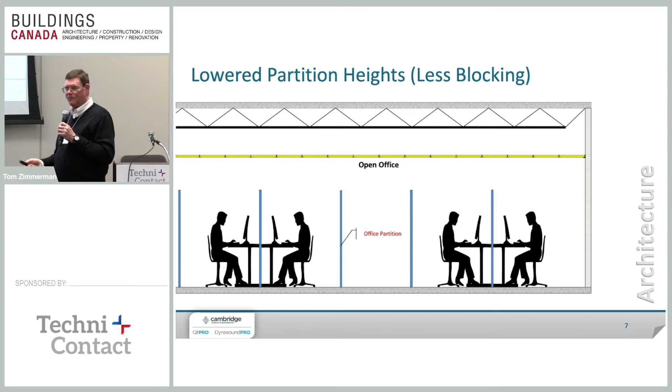So again, we're going to go back to the basics here. If you grew up in my generation, you had partitions, you had cube farms, so you had partitions everywhere that blocked you from the people around you. And so this blocking sort of was your privacy mechanism. So what we are doing now is we're kind of taking down all that blocking. We're making it so people can see the windows, so that people can collaborate. More and more we hear everybody's got to collaborate. You got to be able to talk to your neighbors. You got to be able to discuss things with everybody around you.

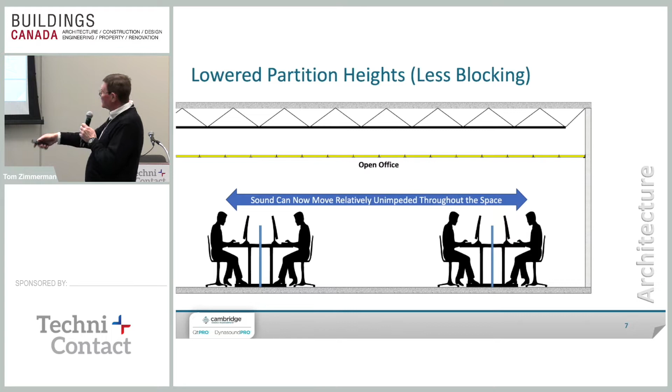Okay, so now sound can travel unimpeded through the space. We've taken our acoustic tile ceilings. We used to be able to have some acoustic tile that would absorb some of the sound. And when you have absorption, the sound that hits it is less when it gets to the next person on the bounce of that sound. So we take away the acoustic tile ceiling. We now have a hard reflective ceiling, the deck basically of the floor below or the floor above you.

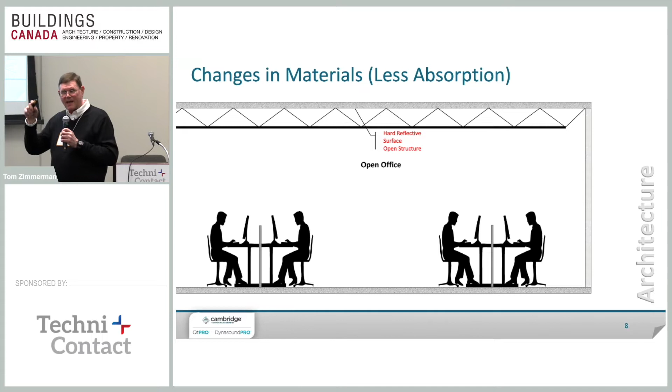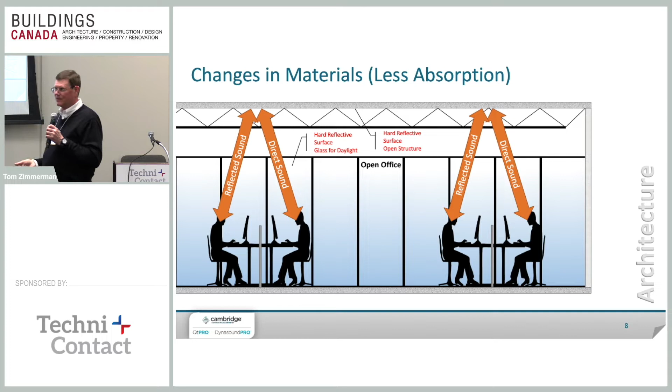Sometimes you spray it with some acoustic material, sometimes you put fire retardant, sometimes you put other things that can absorb some things, but not as much as an acoustic tile ceiling. So now sound is directly reflected back up and down. You also put in glass. Now everybody can see a window, so you have this new reflective surface, glass, which is not very absorbent. And so you have this hard surface, and now people hear more and more things bouncing off the glass as well. So the sound builds up in these spaces.

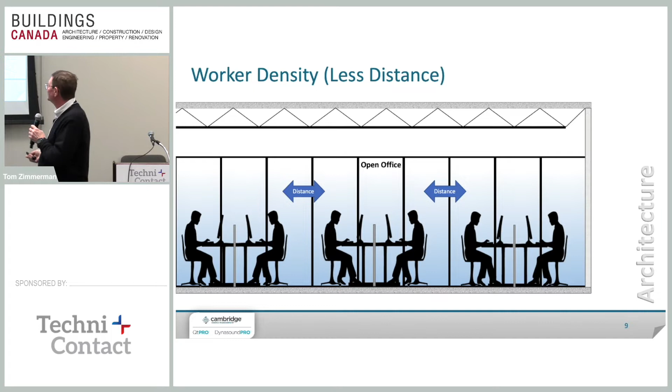Then you have the worker distance. You used to have people basically in an 8x8 cube, maybe a 10x10 cube if they were really lucky. And what we do is we take all of those people and we shift them closer and closer together so that now the worker distance is basically one person for every 10 square feet instead of 100 square feet. So again, that's what's happening here.

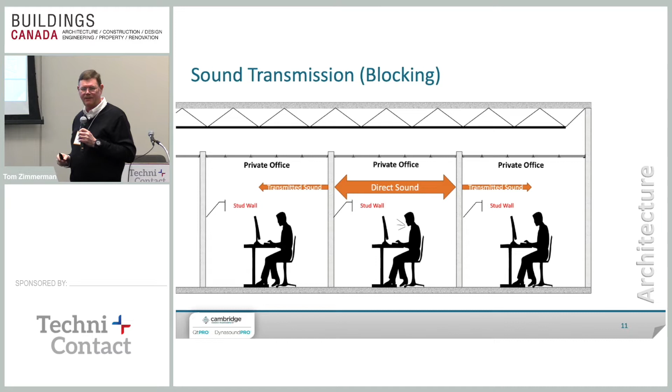Private offices, the same sort of thing is taking place. You used to have nice, thick, usually double gyp walls with furring in between, some space gaps, maybe even filled with some fiberglass. And what we're seeing is, first we said, well, we're not going to take those walls all the way to the deck. Because it's a lot cheaper, we're going to just build them up to just above the finished ceiling. Then what happens is that we have the sound that bounces over top of that. So people are now hearing directly from the offices next door. So you still have a little bit of sound that's taken away, but you have a lot more that is just bouncing over the top.

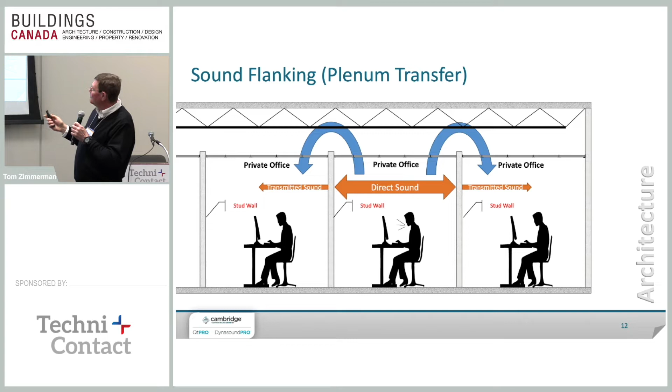We found that you get tax credits and other things for putting demountable walls in instead. And facilities people love demountable walls, because if you decide to rearrange the layouts, if you want to do other stuff, you just take them out. You want to turn this private office into an open office, that's great. This is really easy. The problem is that demountable walls are not as thick. They don't block as much sound going between them. So again, you get more transfer from one person to the other.

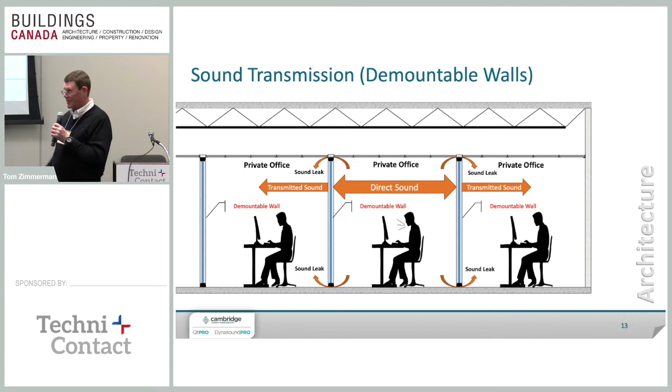You have sound leaks at the top and bottom. Usually you have gaps of some sort if the furring isn't done just right. If you don't seal them properly, you have a lot of sound that gets transmitted right over the tops of them, plus the stuff that goes over the top naturally. Also in private offices, a lot of times you have the electrical receptacles back to back, so sound leaks around those. If you have any ductwork that has penetrations, it goes right through those too. And if you have ductwork that's not properly fitted, that doesn't have baffles in it, you have an instant intercom that goes between all of those offices.

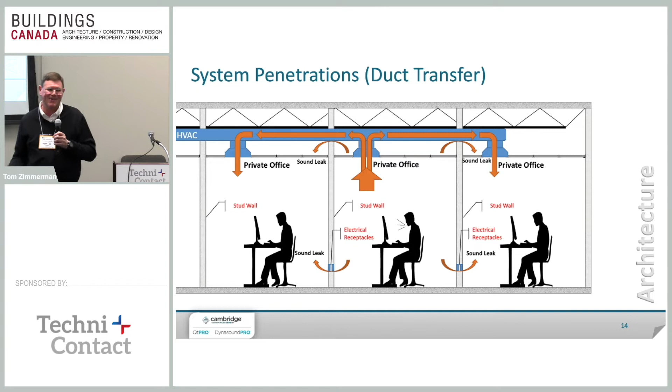So again, we normally get calls from people saying, it's as though there isn't even a wall here. And I go in and I look and I said, well, there really isn't a wall there anymore. It's all just an acoustic nightmare. So we're going to look at types of sound masking.

Again, I don't know why this guy's always on his toes, but he is. And he's a happy guy.

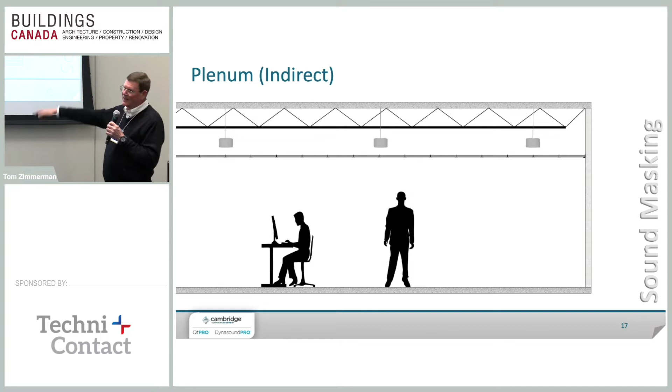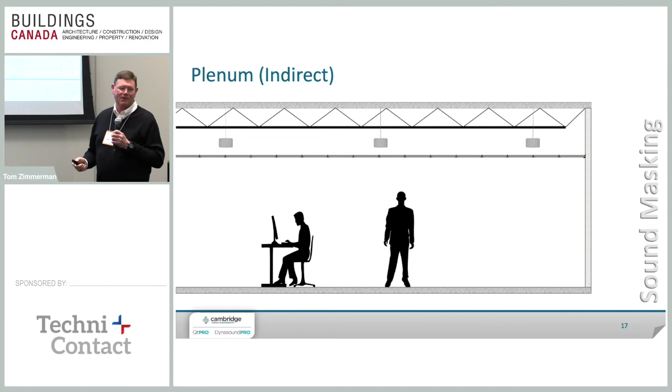So we put up the sound masking, and in this case it's called an indirect system. Indirect means that you can't see it. It's above the finished ceiling. Okay? So a lot of architects in particular don't like to see anything on their ceilings. Interior designers don't like to see things on their ceilings, even though there's hundreds and hundreds of WAPs and LANs and other stuff going on. They don't like to see speakers on the ceiling. So we put it up above the ceiling, and again, we bounce it up off of the deck above. It comes down, it filters down, works great.

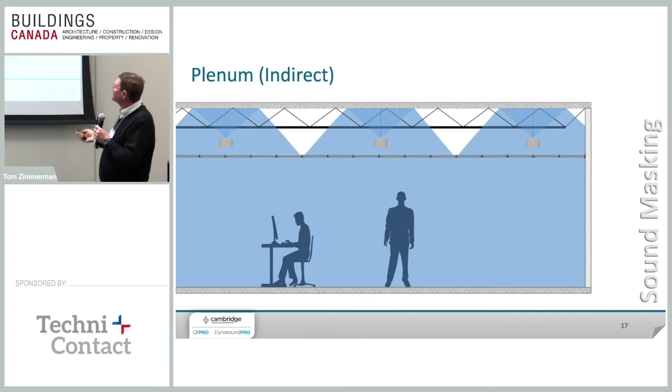And we can design these systems as long as we know what that ceiling material is. The reason we need to know that is if it's fiberglass or something that could be absorbent, but not very reflective, it doesn't have a good CAC value. If it doesn't have that, then it tells us that we need to space speakers closer together. If it has a high CAC value, like mineral tile or something else, then we can space the speakers farther apart because it does more bouncing up and down between the deck and the material before it filters down.

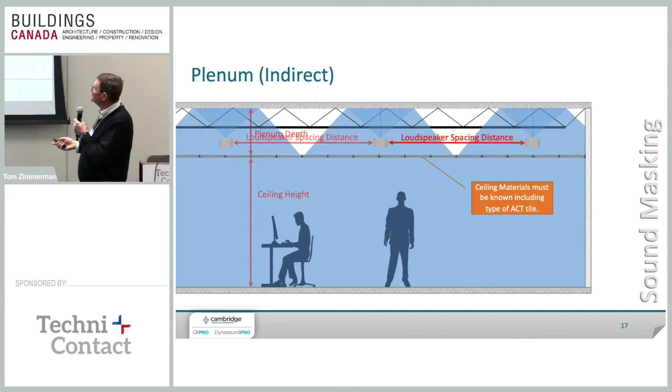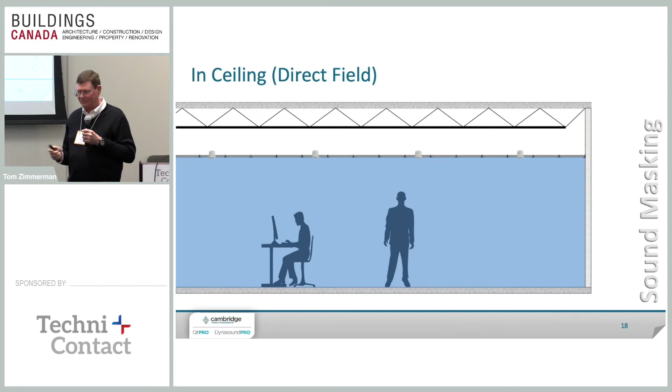So our loudspeaker distance is all based on what that material is, how high the ceiling is, ceiling height, plenum depth. We need to know all those things in order to design an effective system. Our company has a patented system that we call the direct field. So we have little tiny speakers, 3 inches, that go actually firing down or mounted into the acoustic tile ceiling, in this case. And it allows us to exactly know what it's going to sound like when we install it. And I'll get into why that's important in just a bit.

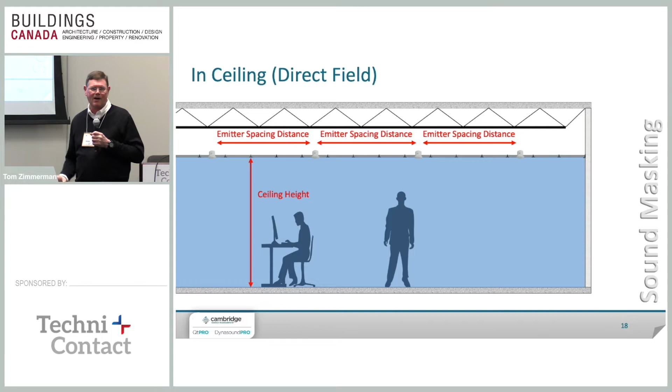So if we know the ceiling height, we know exactly how many speakers you're going to need. 8-foot ceiling, an 8x8 grid. 10-foot ceiling, 10x10 grid. 12-foot ceiling, 12x12 grid. The higher you put them, the less speakers you need because of the coverage of each speaker. You can also mount these direct things onto either the truss or the deck itself or other things. We have all sorts of mounting options where you put them on pendants, whatever you want.

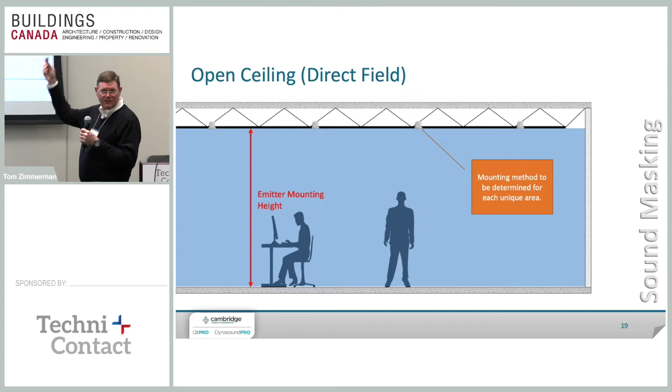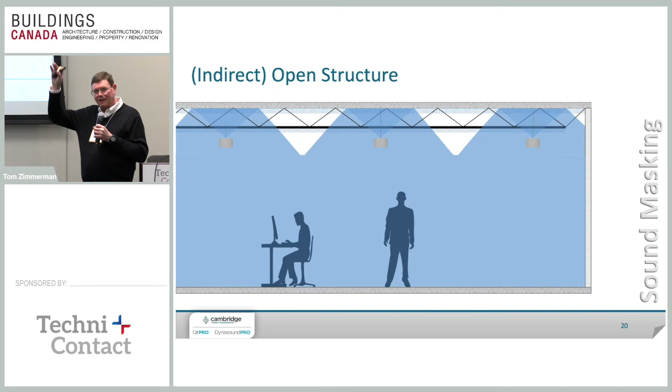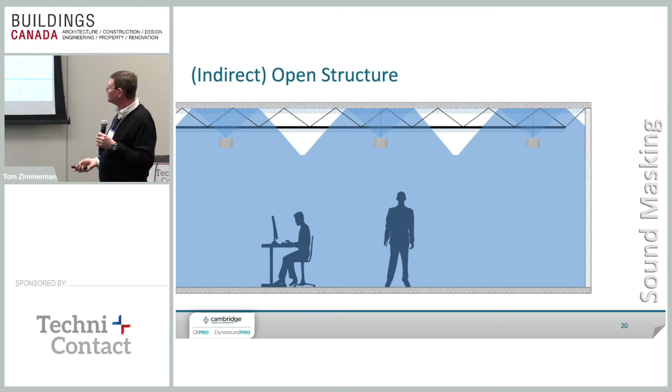But again, you get them up higher, you need less in an open deck ceiling. But again, in this case, we're firing directly down. We know exactly how it's going to sound. So if the emitter height goes up, you need less speakers. The indirect, again, when you have an open ceiling, when you're not doing it in a plenum space, it's just one bounce up, it comes back down. You need more speakers when you don't have that area for it to bounce around up there. So if we know the deck height, we know how many speakers you need.

Underfloor, many people haven't ever even seen an underfloor system. You know, the old dinosaur rooms where they used to have the computers, where everything was raised floors. Well, they still have a lot of those in particularly old bank buildings, old finance buildings and that sort of thing. Places where they used to have big computers that they don't have anymore. So you can actually put these under the floor, have it bounce around in that underfloor plenum space, and then come back up.

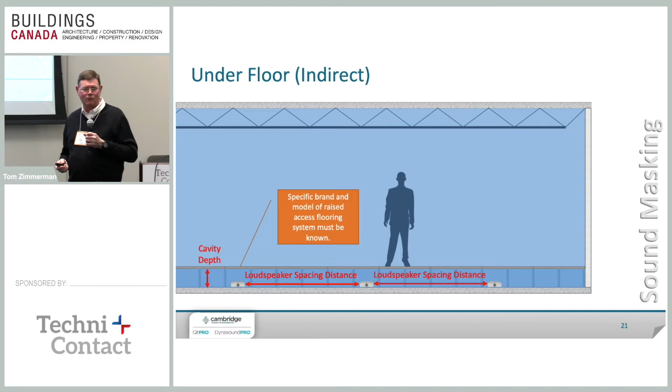Loudspeaker distance, again, is based upon mostly what type of floor material they're using. There's a lot of places that have decided to use like concrete or structure wood products that basically you can't get any sound through. So once we know what that is, we can tell you whether or not it's even going to be a possibility.

Okay, sound masking concepts. 5 things that you have to always think about for sound masking. Proper level. If you play it too loud, people are going to complain. It's annoying. It's not a good thing to have sound masking that's played too loud. A lot of places, they say, well, you know, I really don't care about my employees. We're just going to blast it at them. They will leave. They will absolutely leave.

There's a very fine range of sound levels that you can use that people are comfortable with, that match the rest of the sounds of the building, that actually make it a comfortable place to be instead of an uncomfortable place to be, either because it's not loud enough or because it's too loud. And that's what we always shoot for, is you have to have it exactly right.

The correct spectrum, we only mask human voice frequencies. We don't worry about like your high fidelity audio system kind of thing where you're going from 20 hertz to 20 kilohertz. We only care about masking the human voice. So our spectrum is very specific on how it's shaped, what it looks like.

And again, there are a lot of acoustic consultants that like their particular shape. We are fine with that. We can adjust to any spectrum shape they want. But in general, right out of the box, most of our products will give you a recommended spectrum.

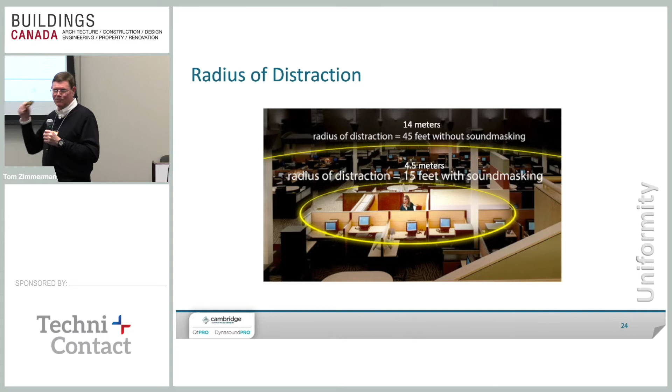If they can't understand what I'm saying, then they don't pay attention. Humans are very specific. If they can understand what you're saying, they can't help themselves from listening. They cannot. And people put on acoustic canceling headsets, like the Bose headsets. And what they find is that they have blocked out the constant noise, and now all they hear are the people talking. So it's really annoying when you buy these $200 headsets, put them on, and go, oh my, now I hear people better than ever. We still haven't figured out a way of canceling out human speech using a mathematical algorithm. Nobody's figured that out.

What we've talked about is uniformity. Loudspeaker spacing. Again, we make a grid. We turn the entire ceiling into an array so that every single speaker is a part of the group. You don't notice any single speaker at all. There's no real loud speaker, there's no real soft speaker. The whole area sounds exactly the same. Variations in building material. We zone the system so that if there's a gypsum ceiling over here, there's an acoustic ceiling over here, it goes to the deck over here.

There's a cafeteria over here where they want to do, say, town hall meetings or something. All of those areas are handled as their own zone. We never try to mix different acoustic type spaces together in a zone. This allows us to control each one and have exactly the right spectrum, exactly the right level for the entire space. That gives us the control that we need by having those zones.

And interference. If you have two speakers that are next to each other and they're playing the exact same signal, there are frequencies that will add to each other, and there's going to be frequencies that cancel each other. So if you play the same sound through every single speaker in that grid, as you walk through the space, it's going to go whoosh, whoosh, whoosh, because the speakers will be summing or canceling as you walk through, and that's how you know that the system has been designed wrong.

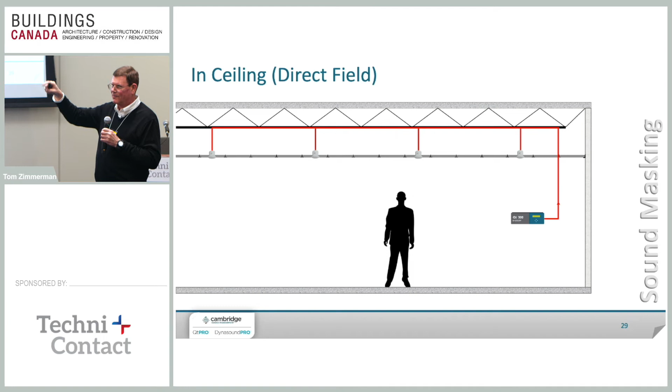For the direct field, again, it's a really simple system, very elegant layout. You take a single Cat cable and you run it to the first speaker. You take another Cat cable that we provide to the next, and it just daisy chains. And as it goes from speaker to speaker, it actually changes which of the masking generators. So that's how we keep them from having the same signal coming out of any single speaker next to another one.

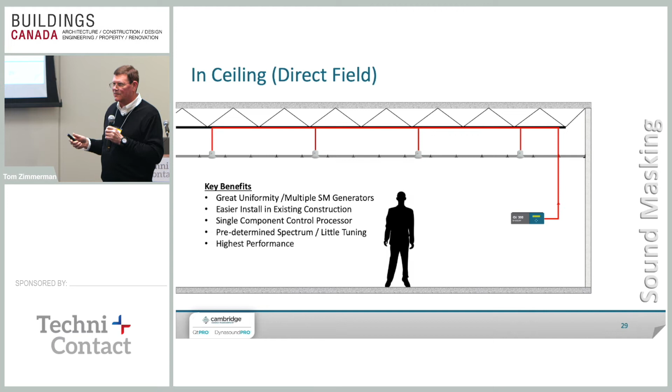Key benefits: great uniformity, multiple sound masking generators, easier to install in existing construction. If you already have a place that has employees in it, this is a nice system to use. It's very easy to install. It's very labor cost effective. And you don't really need to tune it. It comes out of the box already pretty much ready to go inside these spaces.

And again, it uses Cat cable. We actually provide Cat 3. It's not running Ethernet. It's running audio. So what we have is 4 pairs of audio cables that are going to the speakers. Okay? So it's not PoE, it's not any of those things. It's just a way of using audio and using a cable that everybody knows how to terminate, and most people know how to run safely from speaker to speaker.

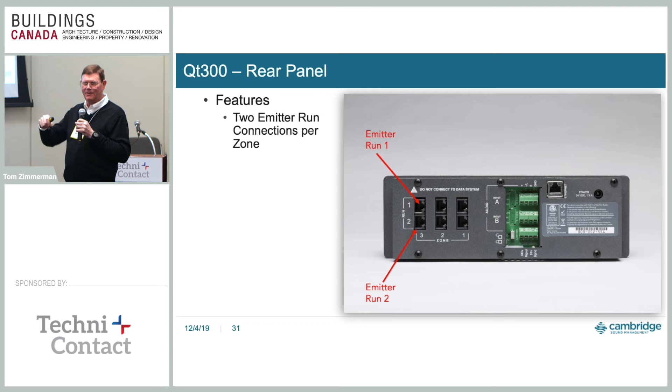Back of the unit, again, multiple zones. You have different runs so that if you have a big open office here, you can start by taking one cable out to this area, one cable out to the other area. We have audio inputs if you want to add paging, music, or bells. We have ways for you to do that. We have contact closures. Many jurisdictions require the sound masking to be muted when a fire alarm or other alarm condition happens, so we have contact closures that allow you to mute those things.

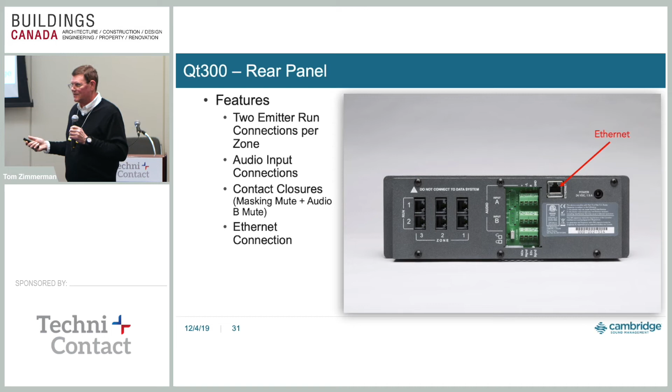We have an Ethernet connection. You can actually put this system onto your LAN or connect to it using a laptop to control it. This allows you to do things like an enterprise that has, let's say, 100 of these units across multiple facilities. You can actually go and make sure that all of them are operating, that there's no fault conditions, that there's nothing else happening.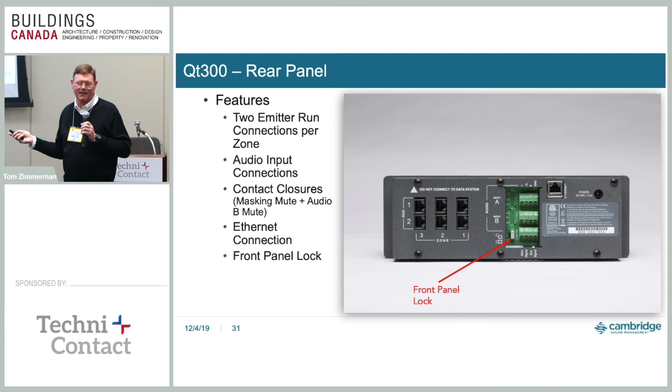There's a front panel lock so that if you do put it into an unsecure space, usually these go in an IDF or a data closet or a phone room or something like that. But if it's not a locked area, you usually want to lock the front panel so that somebody doesn't try to help themselves by arbitrarily moving volumes up and down.

I actually was recently doing a Google facility, and a guy came out and said, "I learned how your system operates and I changed all the levels." I said, "Good for you. Thank you so much." I'm sure Google will be very proud.

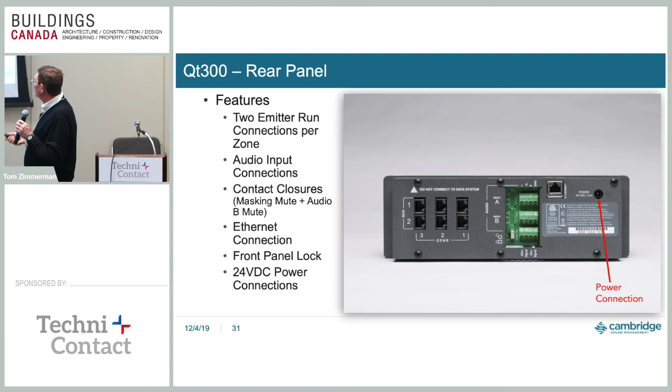So anyway, and a power connection. Again, it's a 24 volt power supply. This unit runs 360 speakers with 17 watts of power. It's LEED certified, it's very efficient, no worry about extra power or voltage going through the system.

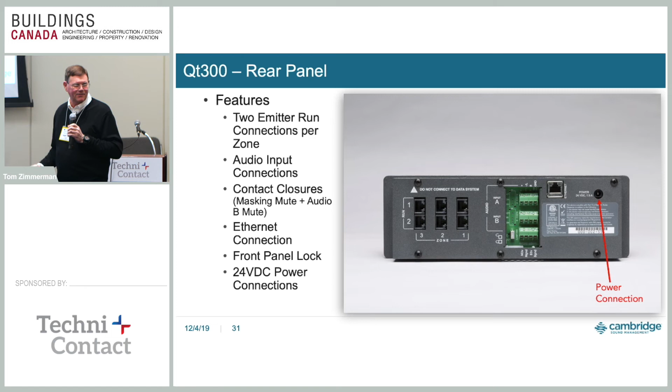This is the third-party interface, as I said. So if somebody does need a VoIP phone connection, generally we don't provide that VoIP phone connection. You'd have a VoIP converter box that would then feed ours. Ours is basically an amplifier, so whatever you connect to it, we'll just broadcast that through whichever zones you want.

That said, there is a dead man's hook on the back so that you could go and tie off each one if the jurisdiction requires you to have seismic ratings or other sorts of things.

There's a web interface built into each of the boxes. This is how you would connect using the LAN. And so it's just a simple password that you use to get in, but we can set multiple levels of passwords. We can have different notifications with emails sent. We can do all those sorts of things that you expect from normal electronics to sort of watch out for the system and tell people if there's a problem.

The other type of system, the out-of-sight system, again, you put your speakers up in the ceiling, you turn them on, they bounce around, they come back down. We call this masking for free, even though you really didn't want masking in this room because there's no walls, there's nothing to stop it. The sound doesn't know that you didn't want sound in there. So we have to be able to program these systems very well, have it tuned usually by our company, a professional tuner come in because I'll show you an example here.

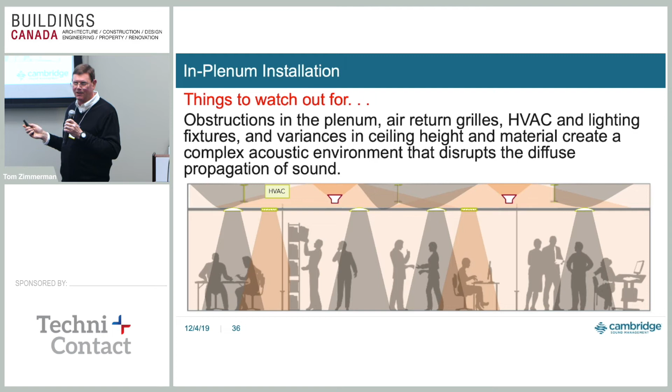So again, being able to control systems like this is extremely important, and our system is actually able to control every individual speaker. So that if this particular speaker is egregiously bad and dumping sound, we can actually turn that one speaker down, we can change the spectrum, we can do all sorts of things to make it so that that sounds like every other speaker, even though it's right over an air return grill.

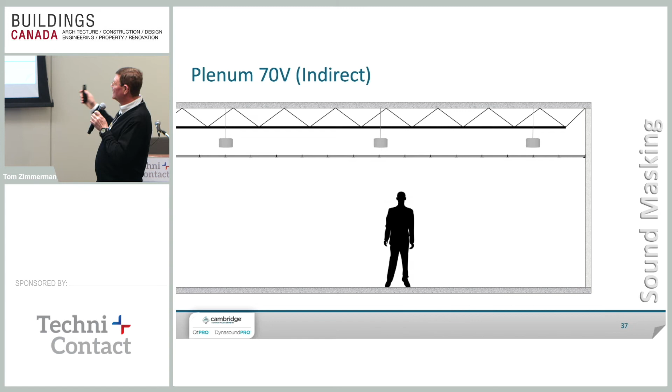70-volt systems, this is what I call masking by the acre. This is what was originally the breakthrough product back in the 1950s and 60s, where you could add sound masking with huge racks of equipment and big amplifiers and stuff. And it was not really able to be uniform because you only had these little taps on the tops of the speakers that allow you to control them by 3 dB steps. We tried to keep a uniformity of plus or minus 1 dB throughout an entire building. These you control up to about 3 dB.

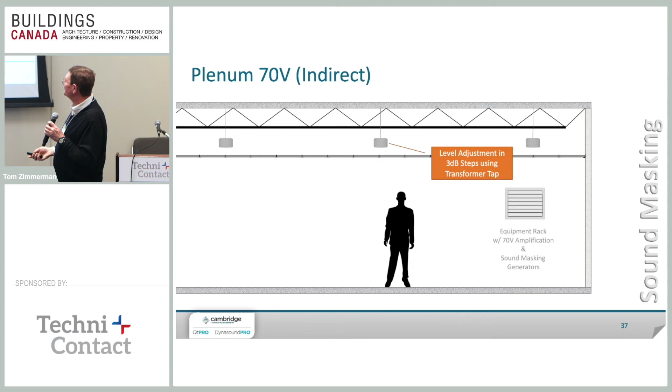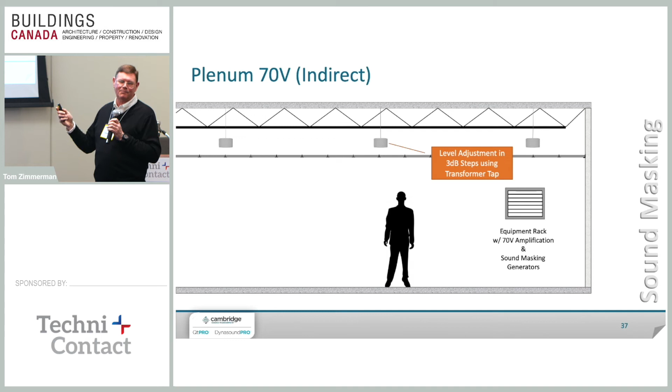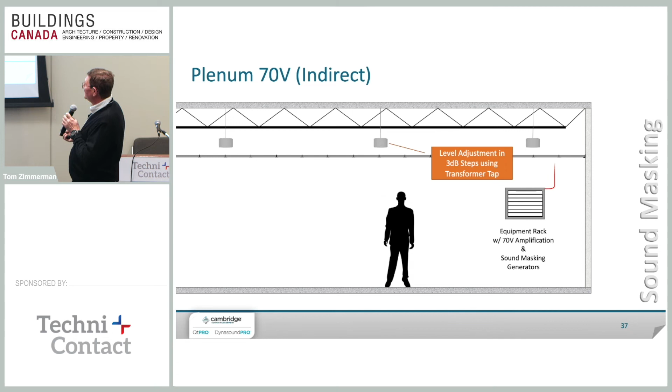It's got the equipment rack. Again, you put as many speakers on an amplifier as the amplifier can handle. So if you have a 200 watt amplifier, you can put about 160 speakers on it. If you have a 600 watt amplifier, you can put about 500 speakers on it. So it's very efficient, but it's not very uniform. It is the lowest equipment cost. It's almost always going to be the lowest equipment cost.

You have a centralized equipment location, easy to install during new construction because you can get your labor in there, hang all of the mounts and everything above, mount them to the deck actually before the ceiling grid even goes up and stuff. So it's very efficient from a labor standpoint, but it can also be the lowest performance. But we have clients that this is all they do. Some really big ones. Acres and acres of it.

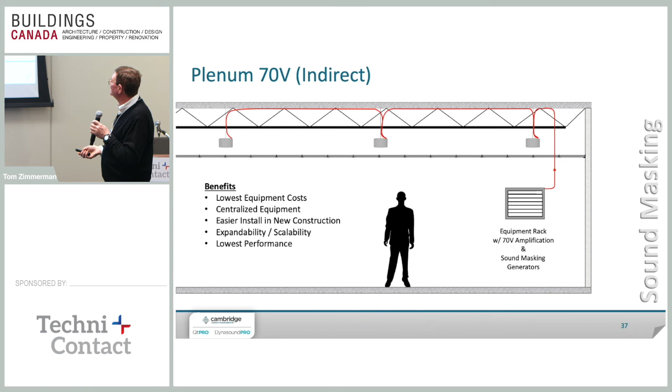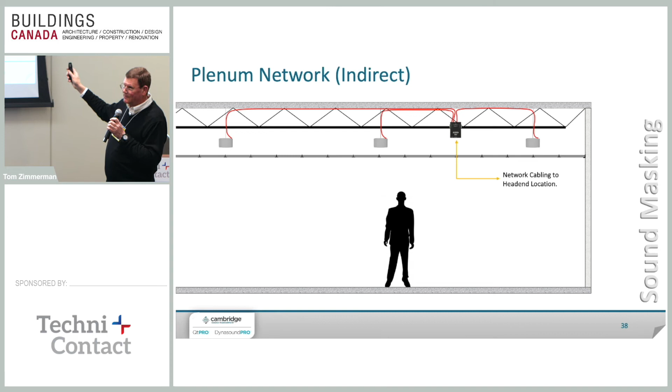This is the other type of indirect. It's a network system. There's actually a controller. This is a PoE powered device. This controller has 8 amplifiers built into it powered by PoE. This is what allows you to control every individual speaker. So basically you run from a PoE switch in your LAN room and you go out to these controllers, and that's where the speakers are powered from.

You have excellent uniformity. You can control every single speaker. You can reconfigure, like if you went and took one of those DIRTT walls or reconfigurable walls, blew it away, had it all open spaced, you just go back to the software and you can change what's happening in that space. Very good performance.

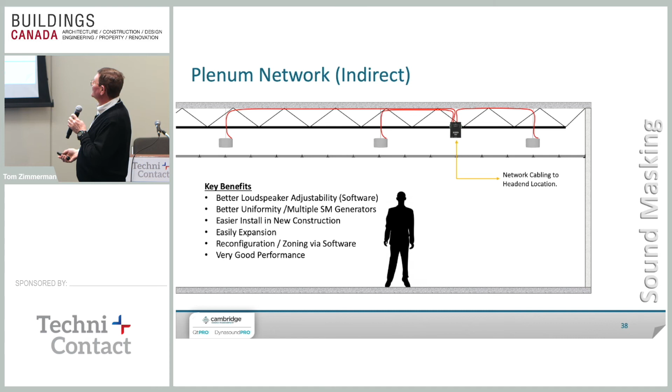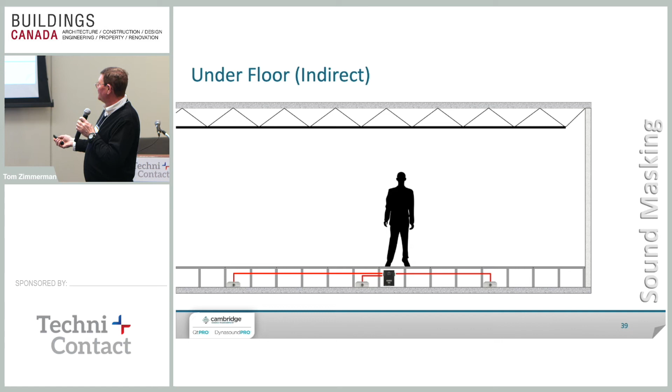Underfloor, again, I'm not going to dwell on this too much. I don't see that happening a lot, but we did just do a recent install here in Toronto that is an underfloor system, so it can be done here. And again, we just run speaker wire from that controller device, go back off to head-end location, and again, fairly uniform.

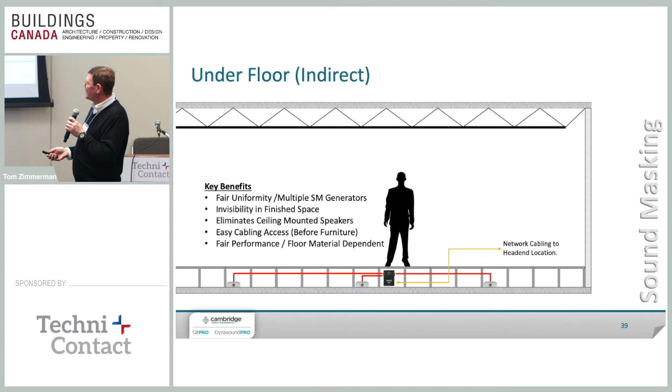There's a lot of penetrations when you have a raised floor. You have all sorts of things that you wouldn't think about, like HVAC ducts that penetrate there. You have all of your AC connections in the floor. So there's a lot of places for sound to just sort of leak out. So it's not quite as uniform as something in the ceiling. And it's easy if you get it in before the actual furniture comes in.

So if you wanted a paging system that did just 1 speaker in the loading dock and 1 speaker in the kitchen area and 1 speaker in the security office, you can get to that level of granularity with the system. It's very, very sensitive. You put that unit up in the ceiling, you have 8 speakers that you can run off of each one of those devices. As you expand the system, you have the software that comes into your switch going out through your patch bay. And then you just go floor to floor.

You can do hundreds and hundreds of speakers, entire buildings. You actually have fiber connections so that if you want to page from one building to the next, you can just connect by fiber between them. It's quite a sophisticated little system, and all run off of a single touch panel. And if you want that touch panel on your network, you only have 1 IP address that you'd need to assign for hundreds and hundreds of speakers.

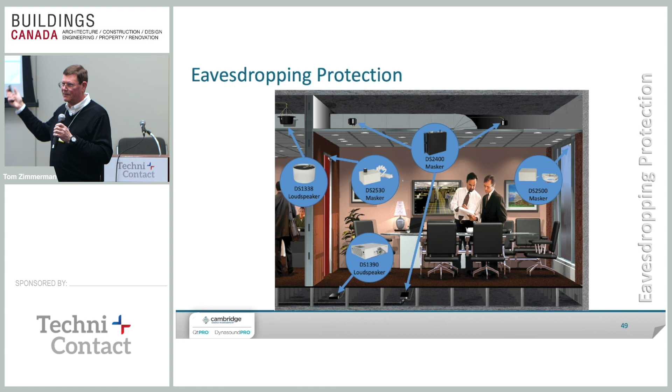So we do a lot of government work, defense contractors; pharmaceutical companies are always paranoid enough that they think they need this in just about every place. Our company basically does all the designs. If you have plans, if you have prints that you want to get a bill of materials for, find out what the cost is going to be, whether it's budgetary, a rough order of magnitude, or a full finished design, we have people that will do the design for you. No fee.

Normally what we do is we have a design fee in the BOM for whoever gets the final contract. So we don't limit the number of potential bidders that would be looking at assisting you on a project, because that price is something they know they will have to pay only if they get the project. We don't charge everybody that's going to bid on a project a design fee because it's in our best interest not to. And we normally do 30 to 40 requests per day. We do up to 600 designs a month, something that most companies don't want to take on themselves. All that we ask is the right information.

Again, if we get reflected ceilings, floor plans, interior elevations, where you want the sound masking and where you don't want the sound masking. A lot of people put down on their descriptions that they want masking everywhere, and if you say that, you get masking everywhere. Where don't you want masking? You don't want it any place where you have to be able to understand what people are saying. You don't want it in training rooms. You don't want it in conference rooms.